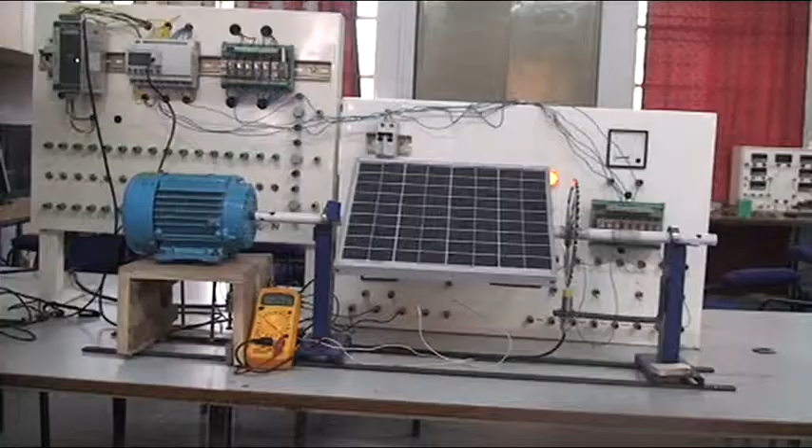The aim of our project is to track the sun in discrete steps from east to west automatically. This can be achieved by using induction motor, PLC, cogwheel, solar panel and V/F drive. Complete automatic solar tracking system. This is a 3-phase induction motor which sits on its base. This one is the solar panel rod which will be connected to the motor shaft. This is the solar panel. The panel rests on this solar rod.

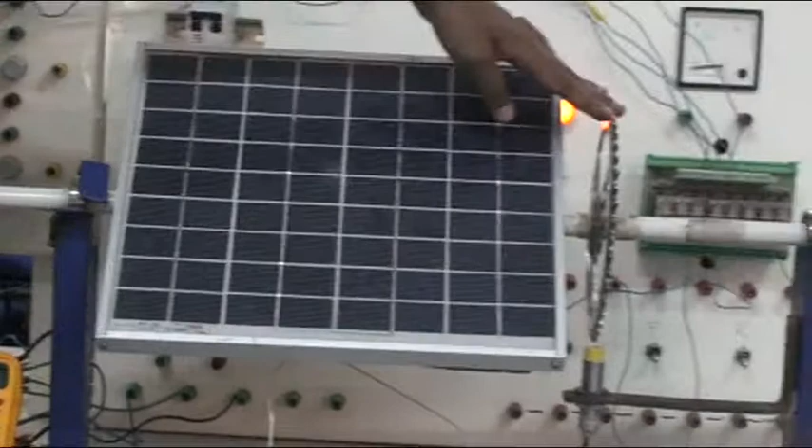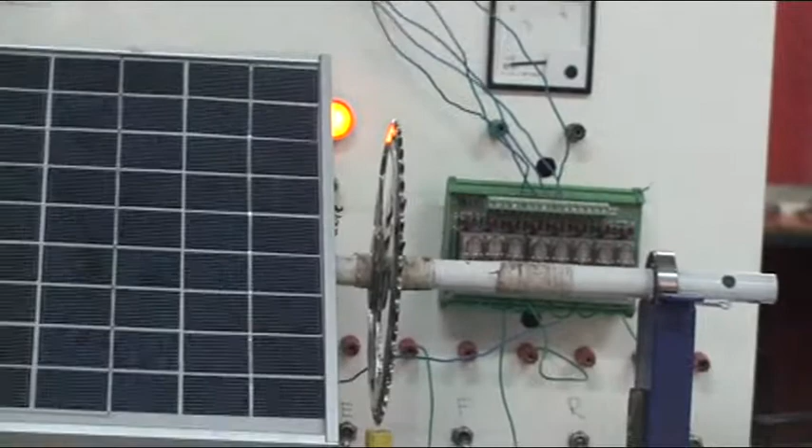This one is the cogwheel with 44 teeth, and this one is the proximity sensor which detects the teeth and the depressions of the cogwheel. These are the bearings which rest on the stand. The automation of the solar tracker is done by using the PLC. This is the PLC panel. This middle one is a PLC. Its manufacturer is Crouzet and its brand name is Crouzet Millennium 3.

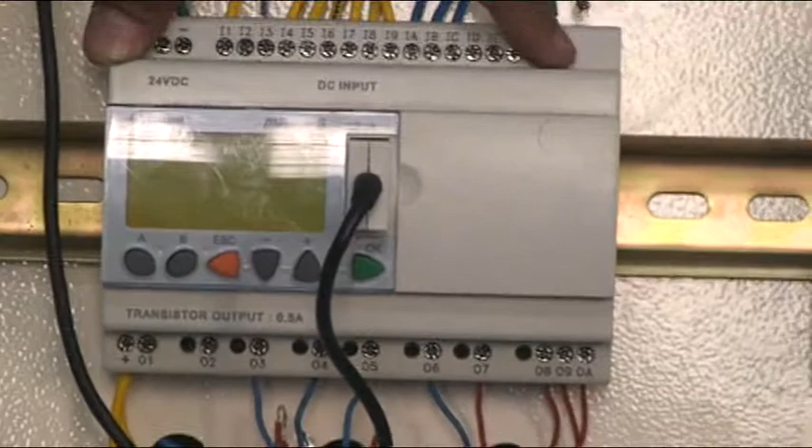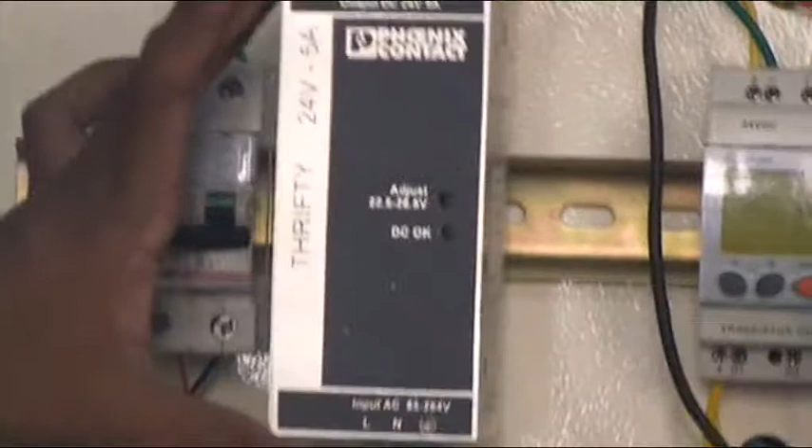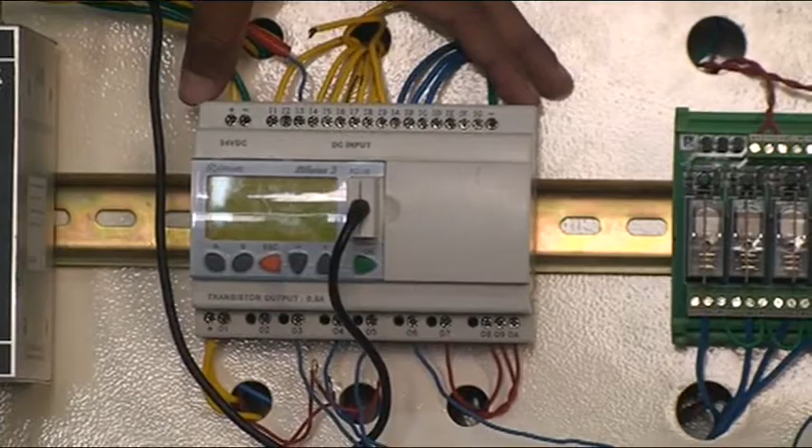Its version is XD26. The power input for the PLC is 24 volts DC, which is given from this Phoenix Contact AC to DC converter. It converts 230 volts AC into 24 volts DC. The PLC has got 16 input ports and 10 output ports. The programming in PLC is done using a software called Millennium 3.

The motor speed can be controlled using many methods. We are choosing the variable frequency method. This device is called variable frequency drive. It is manufactured by Emerson Control. Its brand name is Commander SK. It has got 9 modes of operation, out of which we are choosing one mode called AV.PR mode.

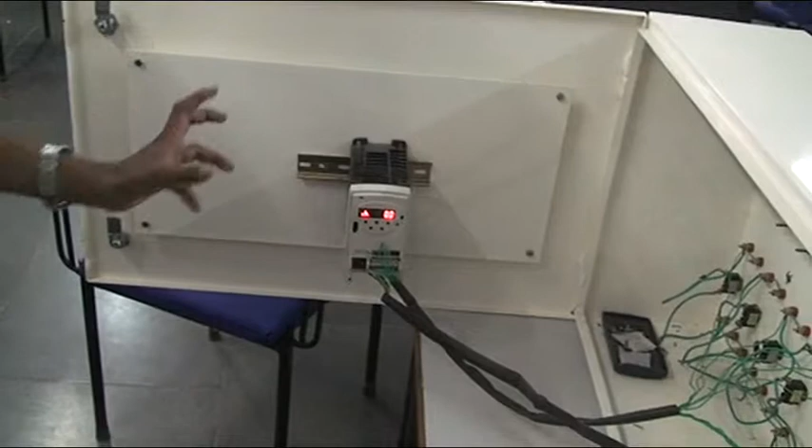In this AV.PR mode, we can set different speeds, which are also called the preset speeds, out of which we are choosing one particular speed at 3 Hz. That means the motor will be literally rotating at 3 Hz. And this device not only controls the speed but also the direction as well. We can rotate the motor either in forward or in reverse.

This is the back side of the VFD drive panel. These are the switches which are connected to the VFD. The motor direction can be controlled using 2 switches, a forward switch and a reverse switch. If we switch on the forward switch, the motor will rotate in the forward direction, whereas if we switch off the forward switch and switch on the reverse switch, the motor will rotate in the reverse direction.

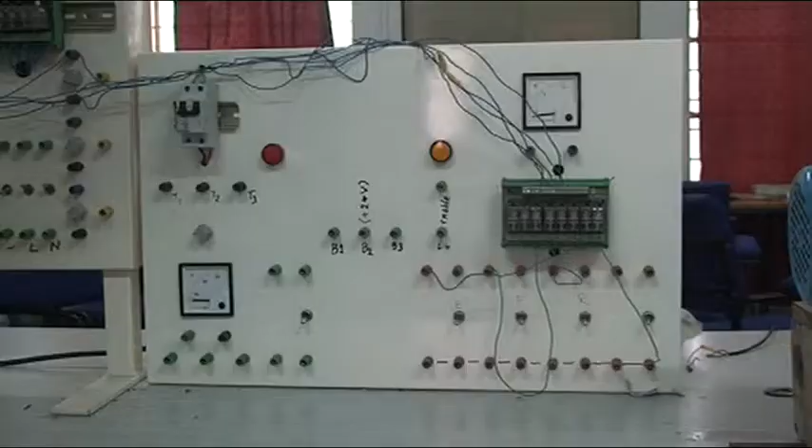This is the VFD front panel. It consists of an 8-channel relay and 3 switches of VFD. The 3 switches are enable switch, forward switch, reverse switch. Here the enable switch is used to enable the drive, the forward switch is used to rotate the motor in forward direction, and the reverse switch is used to rotate the motor in reverse direction. The 3 switches are overridden by relay, rendering them automatic, so they can be operated directly by the PLC. The relay input is connected to the PLC output.

Now how does the solar tracker work? Initially the tracker is in east position. The discreteness of the tracker is achieved using the cogwheel proximity setup. The proximity sensor detects the teeth and depressions of the cogwheel and sends the pulses to the PLC. The PLC processes these pulses. The whole proximity output works as a feedback to the PLC.

The undetected pulse of the proximity acts as a stop command to the PLC. Then the motor will be stopped. Then a timer delay of 32 minutes starts. As soon as the 32 minutes are completed, the motor again restarts. Then as soon as the next depression is detected, the motor stops and the loop continues.

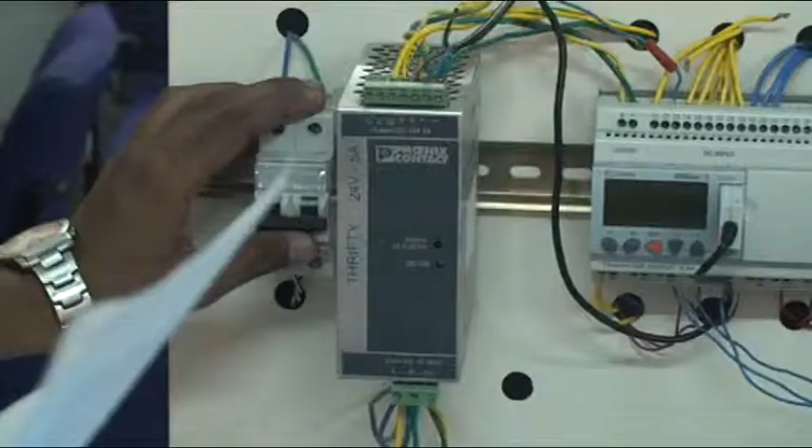First the MCB of the PLC is switched on. The AC-DC converter is on. That means the 24 volts output is attained and given to the PLC. Then the Millennium software is opened. All the blocks on the left side are the input blocks, whereas all the blocks on the right side are the output blocks. To the input blocks, the PLC input connections are attached, whereas to the output blocks, the relay or the panel connections are attached.

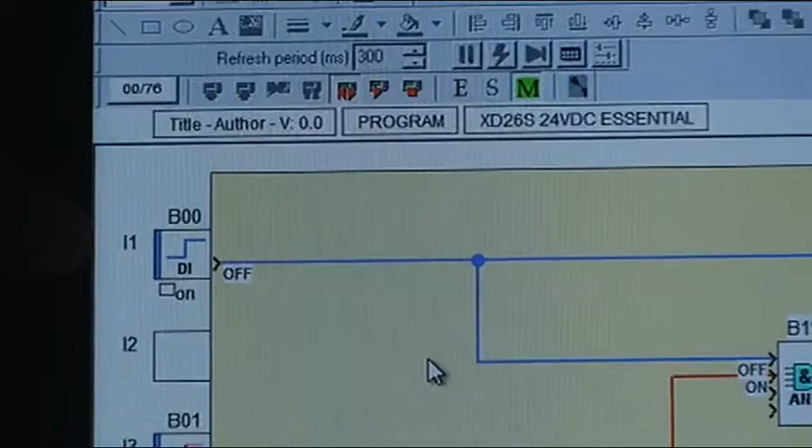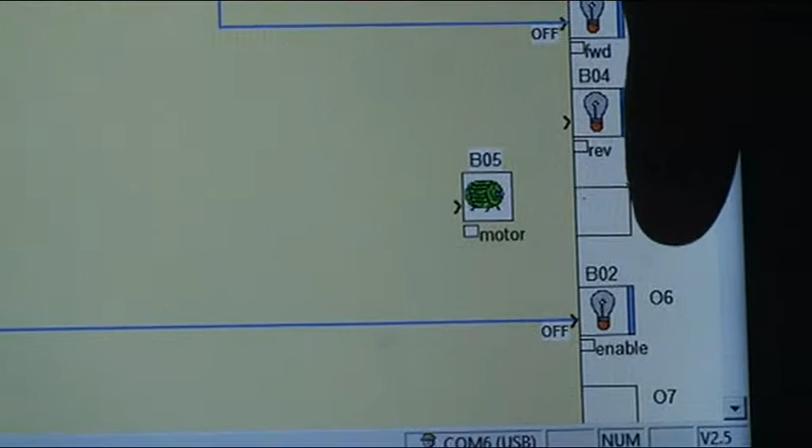The I1 block being shown is the enable block, and the I3 block being shown is the proximity feedback block. The block being shown is the forward block, whereas the block being shown down in the program is the enable block. Now in the Millennium software, after the program is opened, write to controller is clicked on.

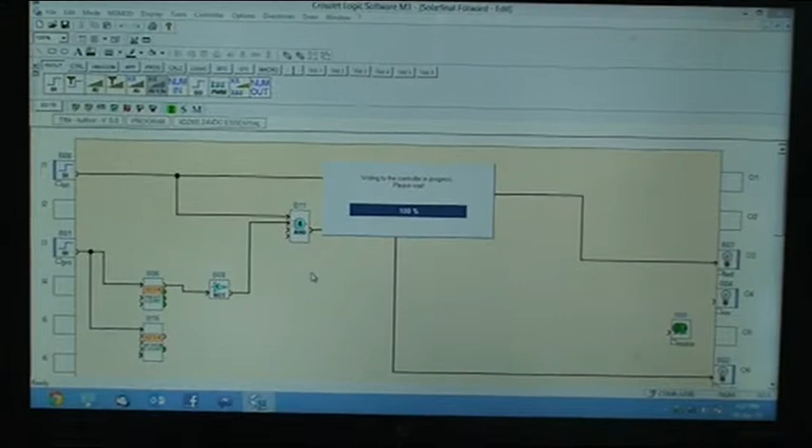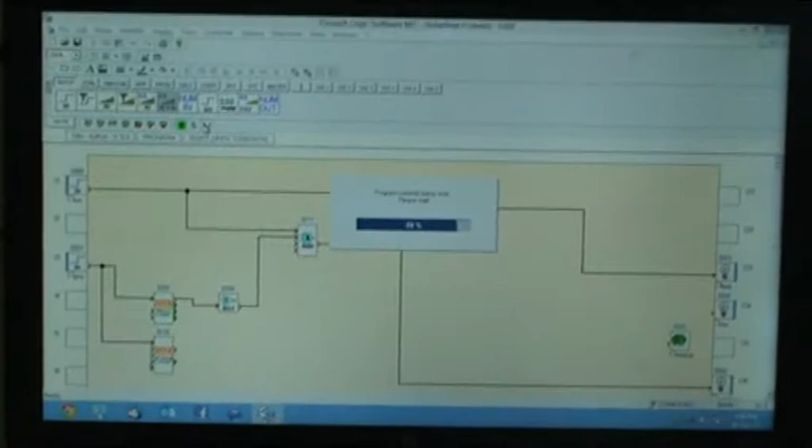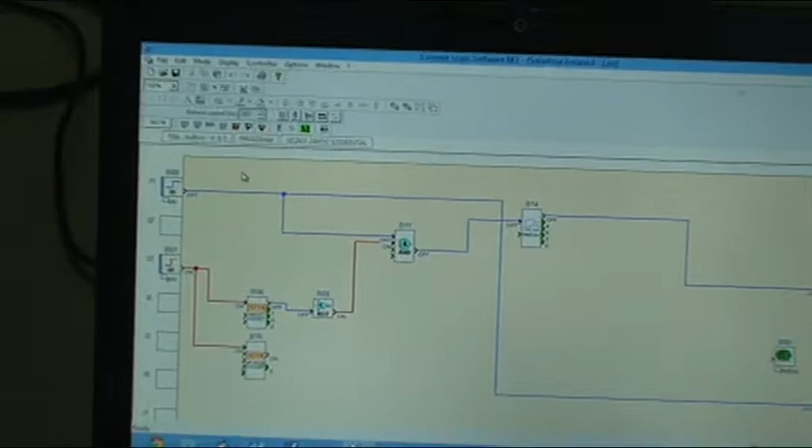Once the program is dumped into the PLC, the module monitoring is turned on. At first the program will be read from the PLC, and then the module monitoring will start. After module monitoring is done, the controller is turned on. For practicality, a delay of 4 seconds is considered. Once the PLC program is dumped into the PLC, the V/F drive panel is turned on. That means the V/F drive is turned on.

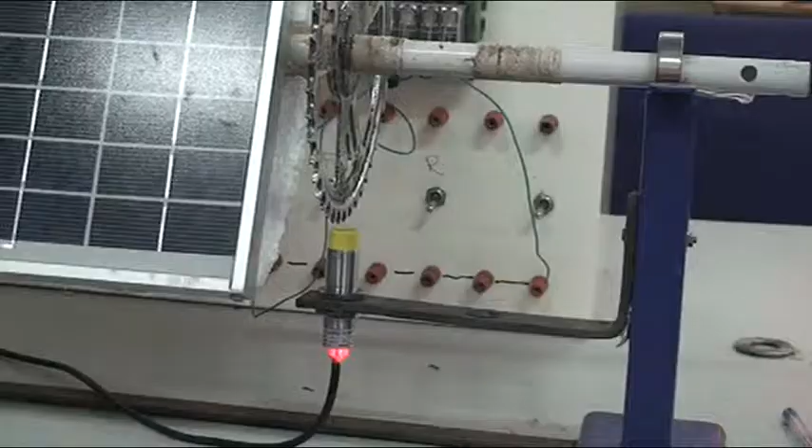Initially at 6 AM in the morning, the panel will be in the east position. Initially the proximity sensor will be detecting the tooth, which will be given to the PLC. The block being shown is the timer delay block. For practicality reasons, 4 seconds of delay is considered. The I1 block is the power block to the motor. Once it is turned on, the motor starts rotating. The motor, after a 4 seconds delay, starts rotating. Now on rotating the panel, the proximity detects the depression and hence the motor stops. In this way the process continues.

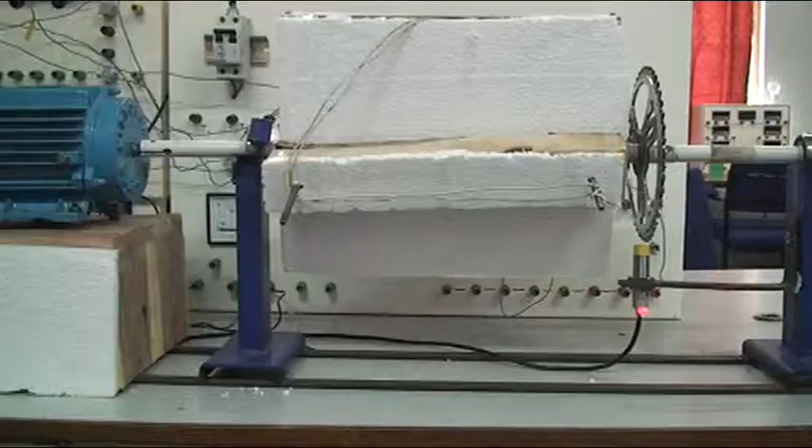Now once the panel reaches the complete west by evening 6 PM, all the 22 teeth will be completed. Now the delay will be made 0. Then it is so programmed that the motor rotates in reverse till all the 22 teeth are detected by the proximity, and it stops at the original position.

Once the motor rotates the panel into its original position, it will wait further till 6 o'clock in the morning. Now at sharp 6 o'clock in the morning, the motor again starts rotating as usual in the forward direction in discrete steps.